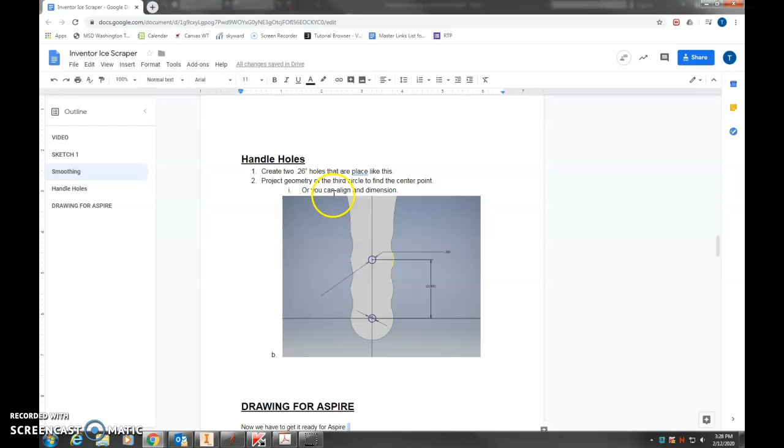So I'm going to start a sketch on the top of my ice scraper, and I'm going to project the geometry. Project geometry will actually copy geometry from other parts, or from other extrusions. So I'm going to click here, and that got my center point. I'm going to go up here to my third circle, and that makes center point 2. Then I'm going to grab my circle tool. I'm going to do 0.26 and 0.26.

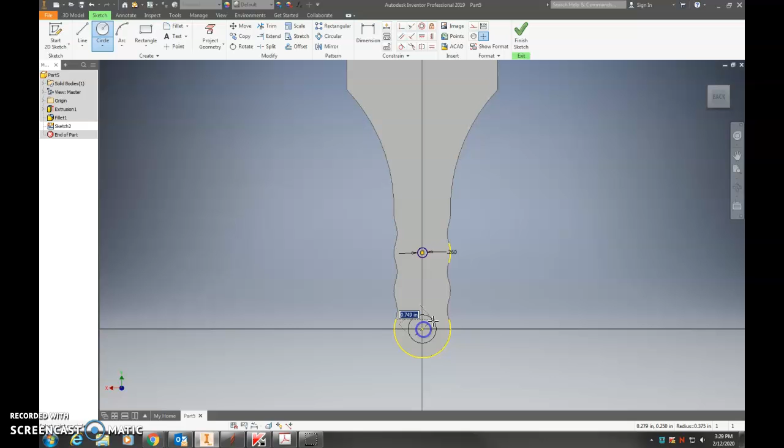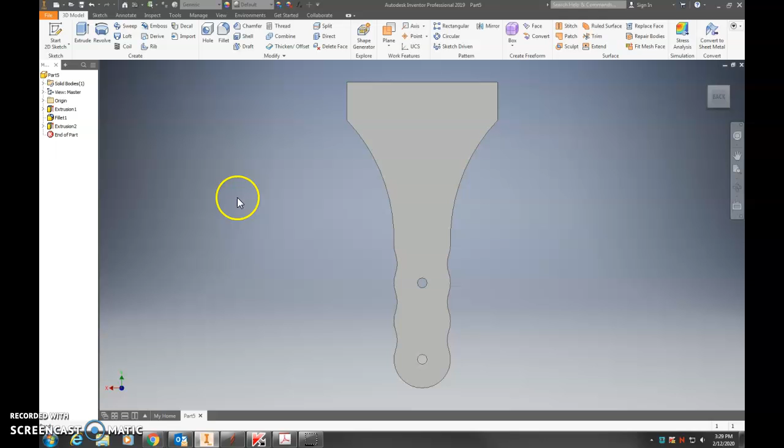That's it. So I finish sketch and extrude. So now I can do this and cut, and it's been cut through. And that will be our mounting holes for our handles that we'll create. So now what are we going to do? I'm going to save this. Save it as something with your initials in it or something, so you know what it is. Okay, and click save.

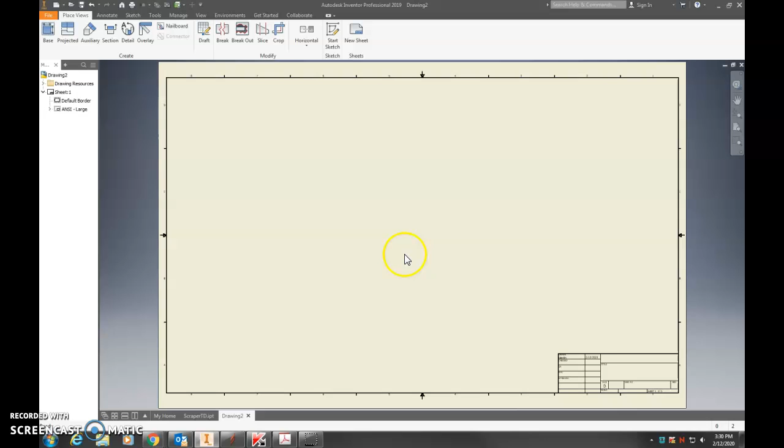Then we're going to go to File, New, and I'm going to choose a standard.dwg. Okay, now when we send this to Aspire, it has to be a certain way. So we have to get rid of some stuff on this drawing sheet. What I'm going to do first is right click and delete ANSI large and delete default border. So it's just a plain sheet of paper.

I'm going to do File. I'm going to choose Edit Sheet, Custom Size. I'm going to call this 8 by 4 because that's the size of our material. And I'm going to choose Portrait and then click OK. And now our drawing file got real different. The proportions are different. So now I'm going to put my ice scraper in.

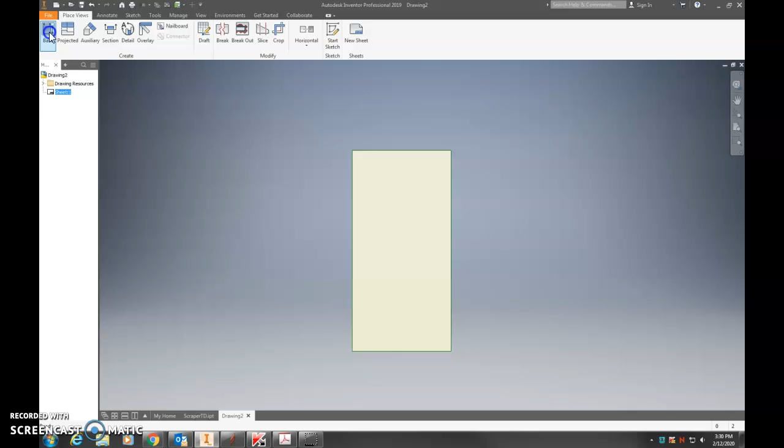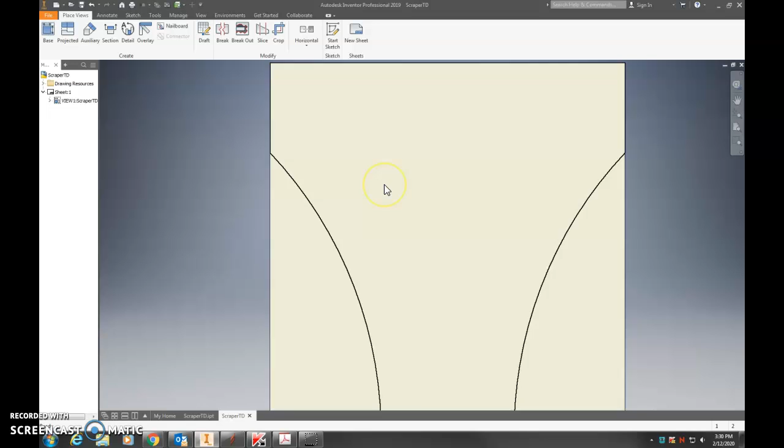So I'm going to choose Base. And if you have your scraper open, it'll automatically choose it. If not, you've got to go to this folder. You click on this and find your scraper, the one that you saved, and click Open. And then we want a scale of 1. And then we'll click OK. And somehow this ended up just lining up perfectly, but that's what you want. You want it filling the whole page.

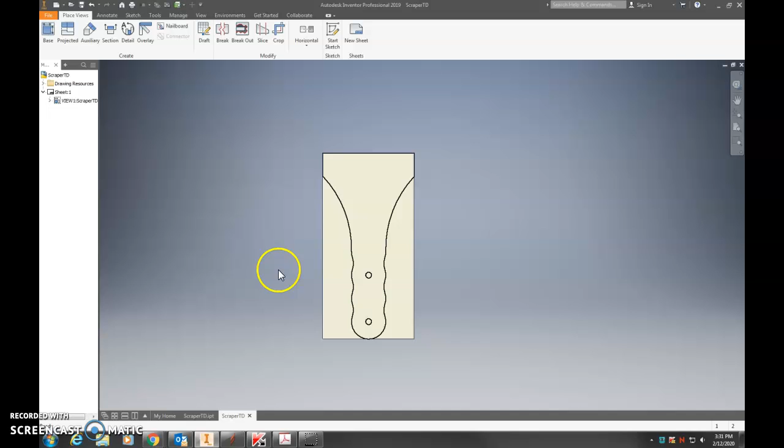And then in order to send this to Aspire, we need a PDF. So what you'll do is go to File, Export, PDF. We'll call this the same name if you want, but it'll be a PDF instead of an IPT. So you click Save, and then that file is ready to go to Aspire. So once it's a PDF, we are going to change this, so you need to make sure you do this before we move on. All right.